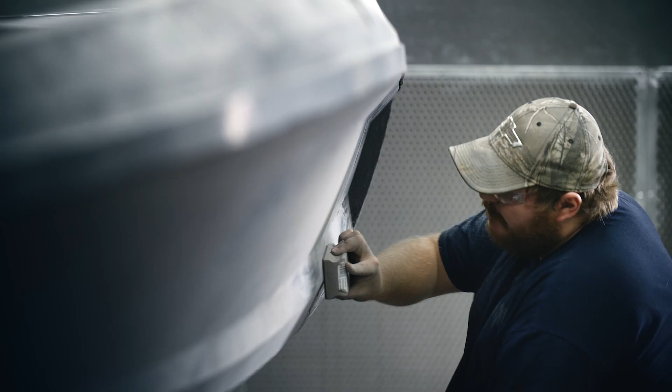Thanks for joining me here at the Vexus plant, where I could take an opportunity to show you a little bit about what was behind the thinking on the design of our all-new VX fiberglass series. One of the things we wanted was a superior ride in the boat.

We look at overall performance of the boat, kind of a three-legged stool. Fishability, certainly you can't give up anything on that side. You need a great ride because we're going farther in rougher water and bigger bodies of water. And then the overall performance of the boat has to be superb.

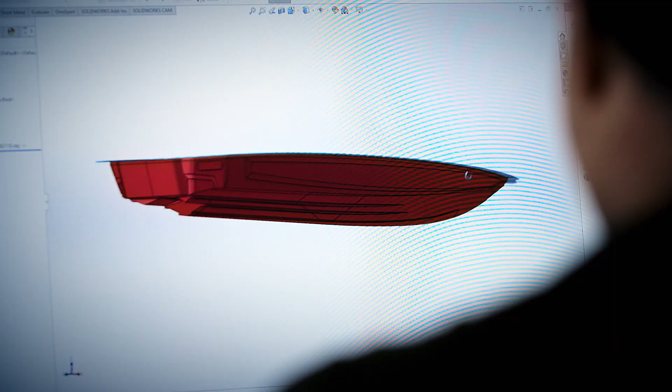So with those things in mind, we designed this one from the ground up, and we wanted to get the fuel under the cockpit, which means that it clears up a lot of real estate inside the boat when you can get the fuel down. With this deep V boat, we were able to do that.

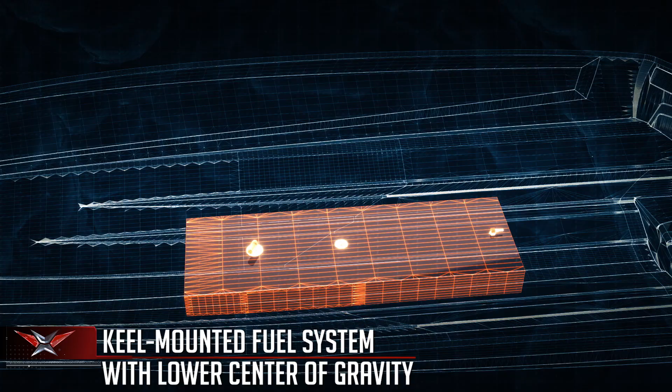We put a longitudinal tank in along the center line of the boat so that we could maintain that perfect center of gravity. Rather than having a transverse tank, which was the other option, the transverse tank has a tendency for the center of gravity to shift in a turn when the fuel tank isn't completely full. So by putting this longitudinally, we could maintain that attribute like we wanted.

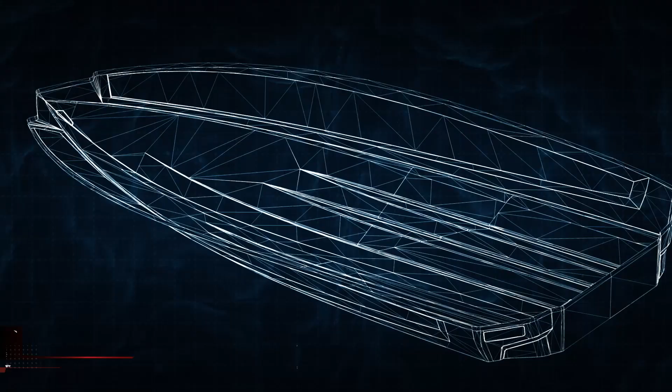One of the other things that we did was we built a boat with a deeper V further forward. And the reason that's important is because when you're hitting the waves in rougher water, that's going to smooth out the ride. We also made it a convex design. So that convex design sheds the water quicker. As it penetrates into the water, it will throw it away from the boat, which softens the ride.

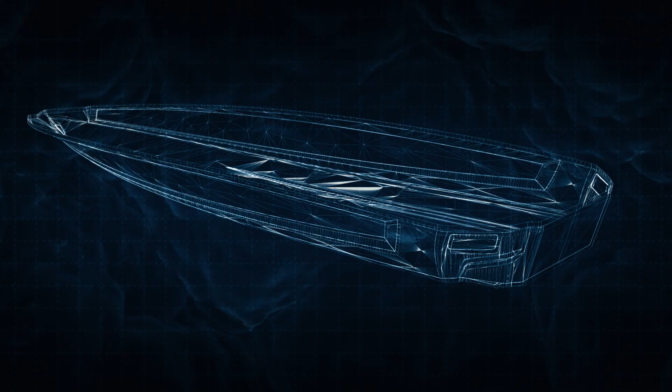Another thing that we did at the chine, which is where the hull turns to the bottom, we reversed that so that the water is absolutely thrown down. As soon as it clears the bottom of the boat, it's turned down back into the lake. We also flared the hull, and by doing that, as you can see, when the boat comes down on a wave, it's going to clear the water away from it. We also have a mechanism here for making sure that it doesn't track up to the rub rail.

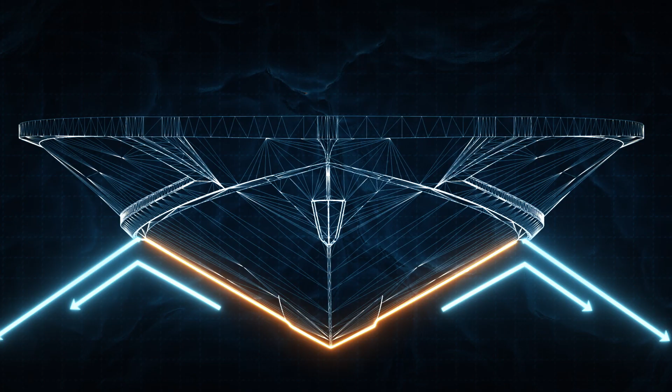As we added that flare, it increased the beam, pulled the shear outward. When we did that, as you can see, a more conventional line would have been for it to go here. When we pull this out, we also pull the deck out with it. It also adds width into the front. So this expanse of room is very important for two fishermen to be able to fish on the front deck side by side. So very important real estate there.

We also got this protected area in the fork, which pretty much houses the trolling motor when it's not deployed, which gives it a good advantage for clearing brush and so forth when you're backing up or swinging around.

Just as important as the shape of the hull is how the hull's constructed. And we put a lot of effort into this VX series hull. We developed a process we called infused composite construction. And that means that we have closed molded, or built underneath a bag, every part of this boat.

The hull has hand-laid materials strategically located all throughout the hull, so we can put triaxial materials, we even have quadriaxial, which is to simplify, to say that we have fiberglass running in the longitudinal direction, in the lateral direction, and at 45 degrees to each other. We can't always predict the stresses that are going to be applied when you hit a wave a certain direction. So having this fiber oriented in every direction is very important for the durability of the hull.

Another thing that we do when we're talking about infused composite, we pull a vacuum on this, so it's an environmentally very clean way of building a boat. The resin is pulled through the fiberglass, so it only requires exactly the resin needed to saturate that fiberglass composite material. So the result of that is that we get a lighter hull, a stronger hull, and a more durable hull with better physical properties because we have infused it with the proper materials.

Because of this infusion process that I've talked about for our hull, stringers, deck, the entire boat actually, we carried that right through to the transom. The transom is without a doubt one of the more important parts of a bass boat. With these larger horsepower engines, the four strokes are getting heavier. We're adding shallow water anchors and a lot of components to the back of the boat that several years ago was kind of unheard of.

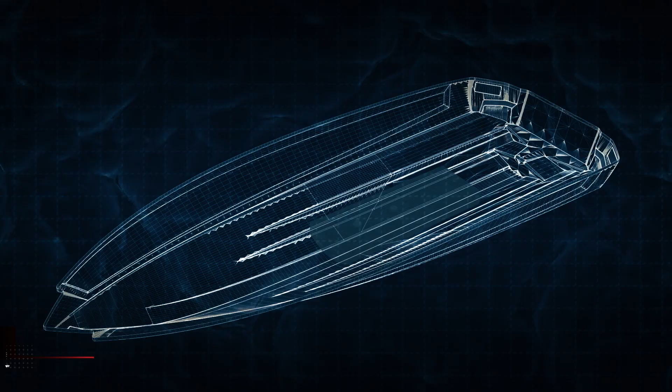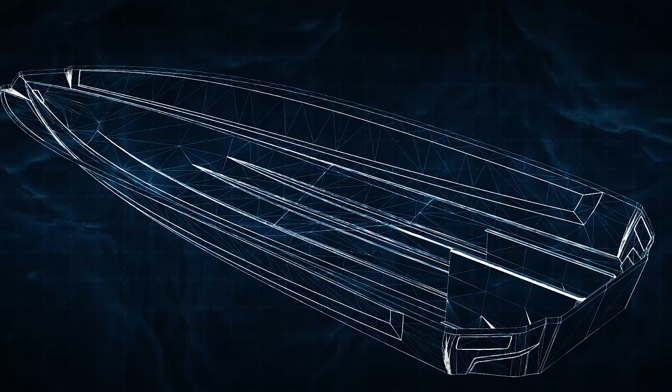When we did this overall design, I told you a second ago about how we pushed the fuel tank forward a bit and put it longitudinally so that we didn't have the center of gravity shifting as dramatically as we do when it's transverse. When we do that and infuse the hull, we wanted to infuse the transom at the same time. So let me break the transom into three segments. The first third is infused right along with the hull. So it's a monolithic infusion where there's no cracks or gaps or anything glued together. It's built in, literally, with the hull.

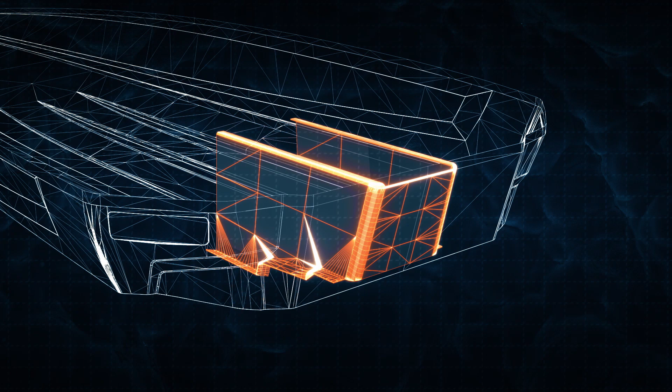The second one I'll call a unibody, which is built out separately and infused in its own mold. It is done that way so that we can engineer the fibers in the exact orientation that we want them. The reason that's important is because the stresses that an engine applies to a transom are generally forward and, believe it or not, backward, as opposed to the hull we talked about having to withstand forces from all different directions. This is to some extent, but as you can see, most of the thrust will be in the forward direction. So we can engineer those fibers exactly like we want them and orient them so that it's consistent and repeatable and lightweight.

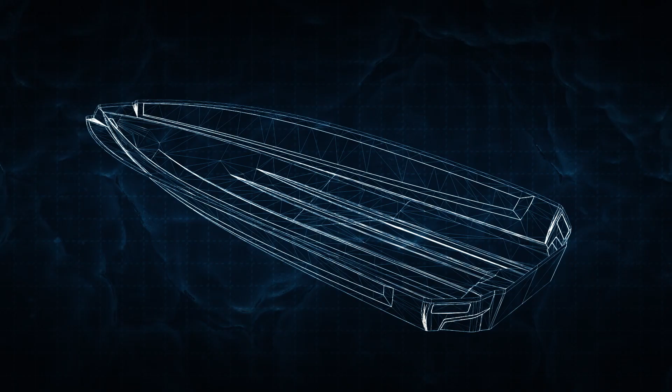Our transoms are all fiberglass. We don't have wood, obviously. We don't have any other kind of foam material or urethane. It's fiberglass, and it's the materials that are oriented in exactly the right direction. We put the final third layer on to make the thickness on the inside, and we do that in this general area from the center line out. Many times the shallow water anchor is hanging off of the engine, off of its own separate bracket. We designed this transom to accept that so we can bolt it directly to the boat. That eliminates that piece and saves weight.

We also were able to integrate a ladder into the boat. This ladder is important for safety and obviously for recreation, but many times fishermen don't enjoy that apparatus hanging on the outside. So it was real important to us to have a ladder that was completely integrated, that would be easily deployed from the outside of the boat or inside the boat. We also included a safety feature so that when this ladder is deployed, when it's ajar out of its receiver, a red light on the dash will come on, which will notify the person in the driver's area that this ladder is deployed. That's good to know if you inadvertently deploy it for whatever reason, or if there's swimmers in the water.

The total overall construction of the hull, deck, and all the parts is infused composite construction. We're taking a lot of pride in the development of that process, and to be able to engineer precisely where we need the fiberglass to be, where we need weight, where we need stiffness. The result of that is when compared to an open molded product, we're going to be lighter. And that's always important to the user. So it improves the payload and it improves performance of the product.